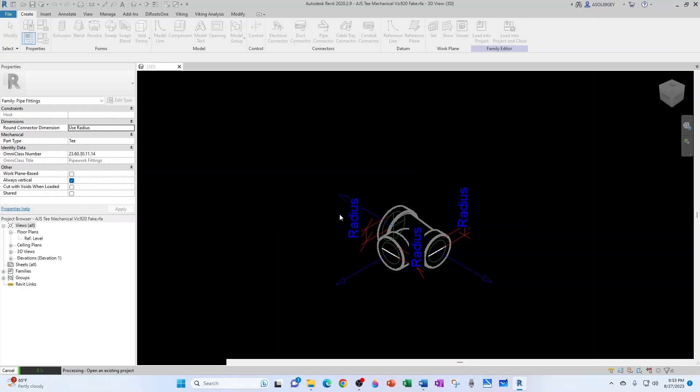We can create a new project to test it out. New project, we can select the mechanical template just for simplicity. Now let's do a pipe, let's say 2.5 inches and 9 feet is okay. So here's my pipe. I'm going to turn on my thin lines and change my detail level to fine.

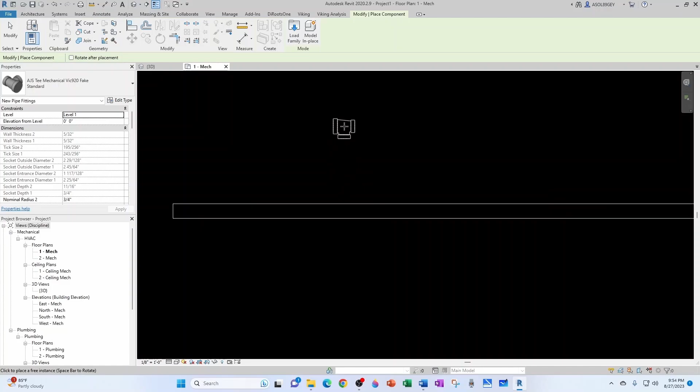I'm going to go back to that family and load it into project. I'll just place it here to the side, and just to make sure nothing's breaking, I'm going to place it on my routing preferences as a T, and test it. So families, pipes, pipe types, standard, type properties. I'm going to edit my routing preferences, and under T, instead of the generic, I'm going to use the one I just created. Click OK, click OK.

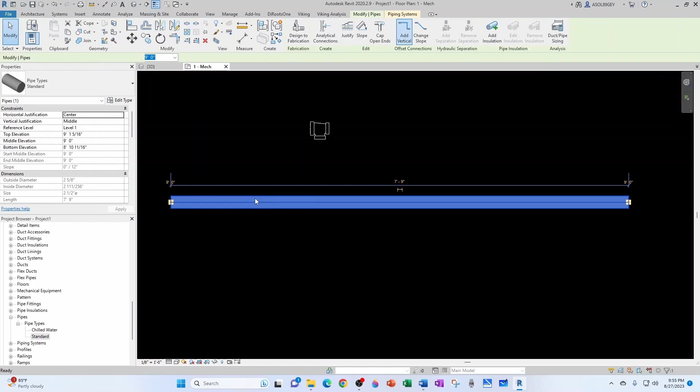And now let's test a couple of sizes. I'll create similar, let's do for example a 1 1/4. Perfect. Let's do 1 1/2. Perfect. Let's do a 2 inch.

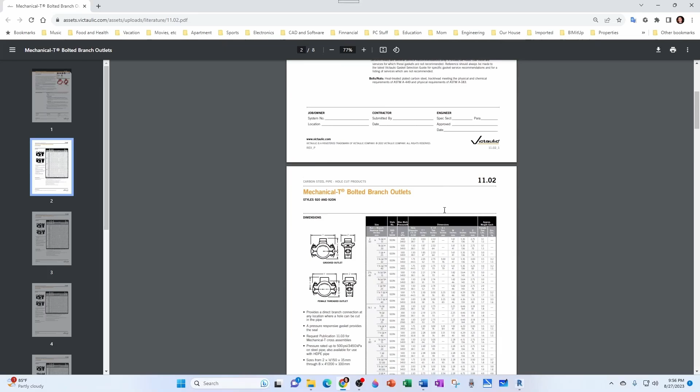Perfect. Now that's a great start, but now obviously this distance here is huge. If you compare it to the cut sheet, let's go down. So this distance Z, it's not even Z, it's a little bit less than Z. Let's assume it's Z, that distance is a lot less than what we have right now. It seems like just putting these two sockets together, bringing them close together, would be a little closer to this geometry here.

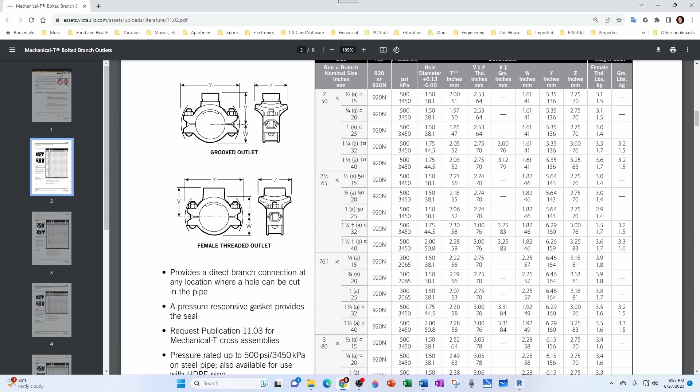So let's give it a shot. Let's go back to our family and go to our reference level, zoom in and see what we can find. So it seems like the distance from the center to the socket is controlled by this reference plane and this reference plane, and that distance seems to be the center to socket bottom run label, right?

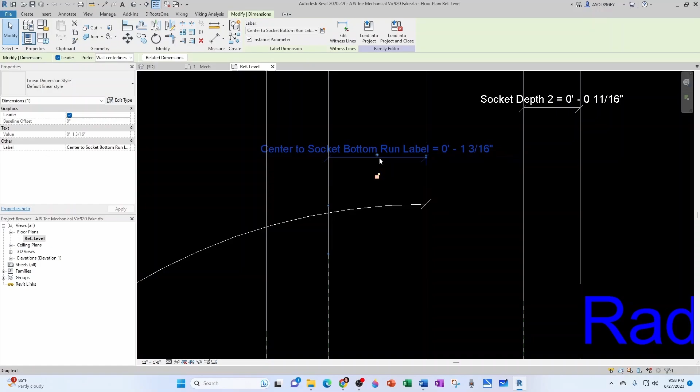Let's see, let's take it out. Yeah, that's what it is, right? So it's this distance here, and that's that same distance here again. So let's start with that. Let's come here and look for that center to socket bottom run, center to socket bottom run. So it's this one here. That's coming out of that lookup table, and the name of the parameter is CTSBR.

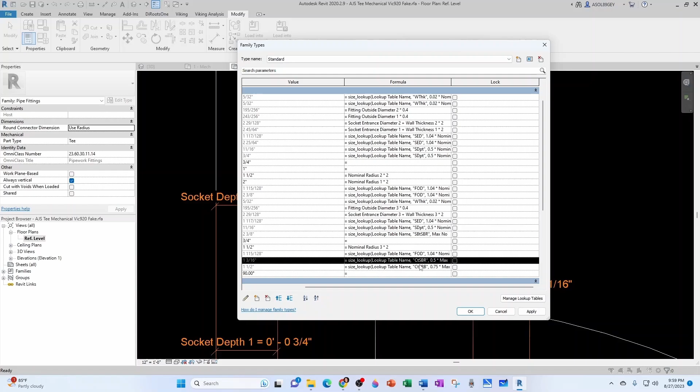So I'm going to take a quick snip of it. And now I'm going to go to that lookup table. I go back to RVT 2020, lookup table, pipe. And now it's easy to find it because I preceded it by AJS. So it's this one here. And now I need to look for that value.

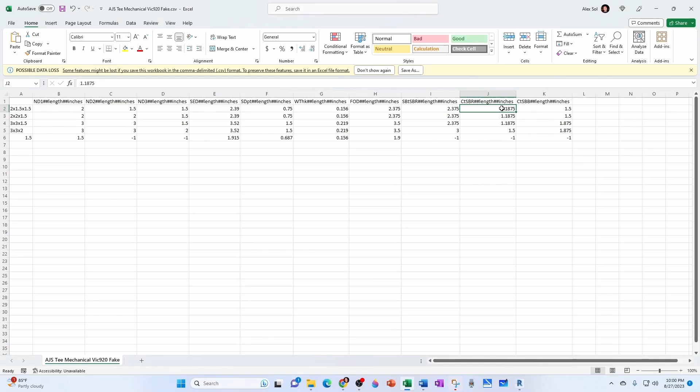So let's expand this, and if we remember correctly, is this value here, CTSBR. So I'm going to take a snip of these values in case I screw up. And now I'm going to make these numbers a lot smaller, let's say 0.1 inch. And I'm going to have that same value in all those 4 cells.

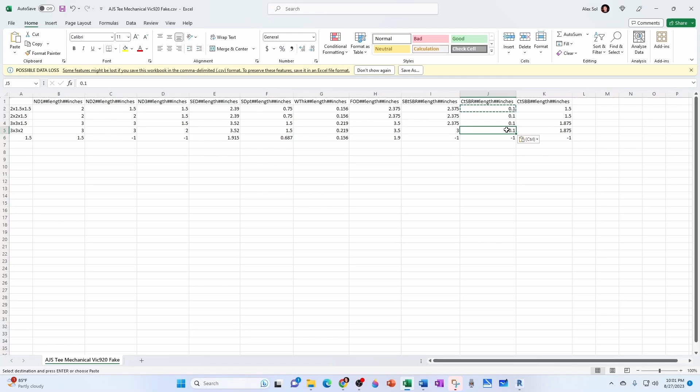Now let's save. Save, yes I want to overwrite. Yes. I'm not sure if I need to reload that here, but I will. So manage lookup table, import. I'm going to import it. Yes, okay, and okay. There you go.

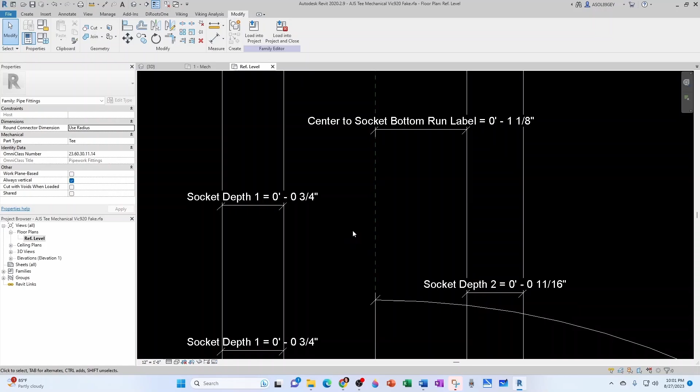You got them a little bit closer. See? Seems like there's some constraints here that I'm not going to deal with. So I'm just going to go ahead and load into project and override the existing version. Let's just retest that. Create similar with 1 1/4, 1 1/2. That's pretty decent.